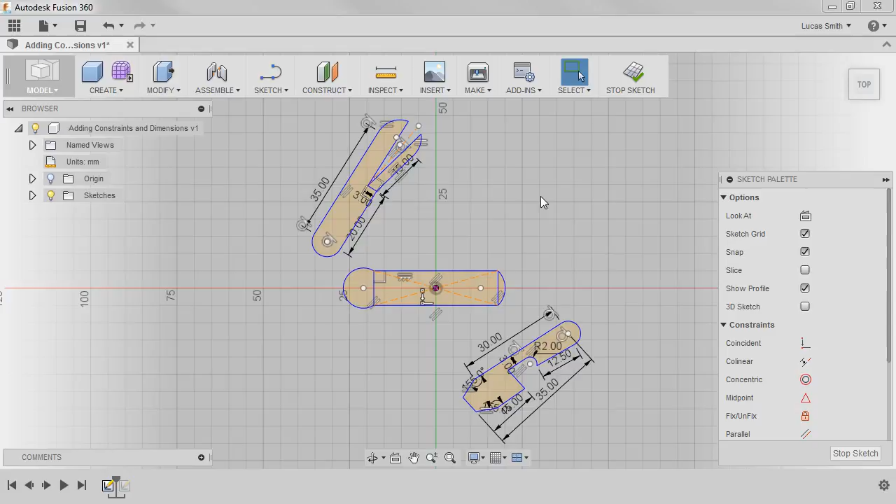To start, I'll constrain and dimension the center rectangle and the arcs in the center of the sketch. I'll zoom in and set the arc's tangent to the rectangle. I can do that easily by activating the tangent constraint, selecting the arc, and the top of the rectangle.

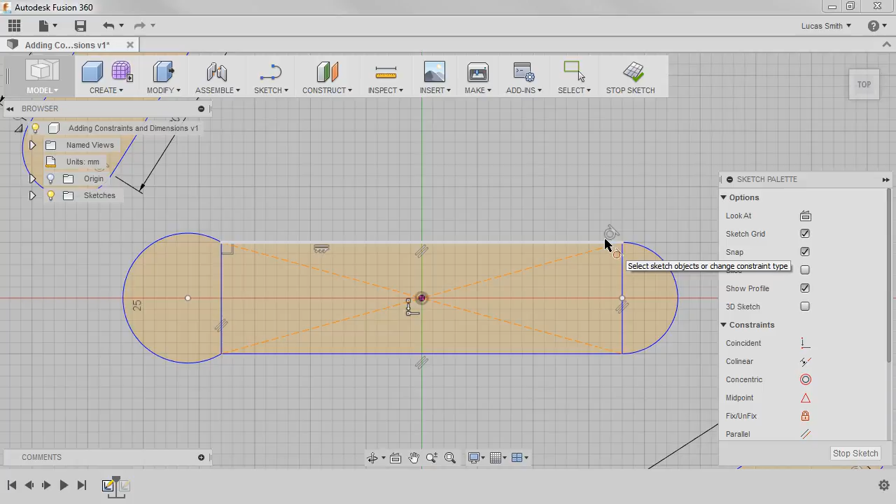For the other side, instead of using the tangent constraint, I can, in this case, obtain a mirrored result with the midpoint constraint. I'll activate the midpoint constraint, select the center point of the arc, and then the left line of the rectangle. Due to the geometry of the arc, this midpoint constraint will make the arc tangent to the rectangle.

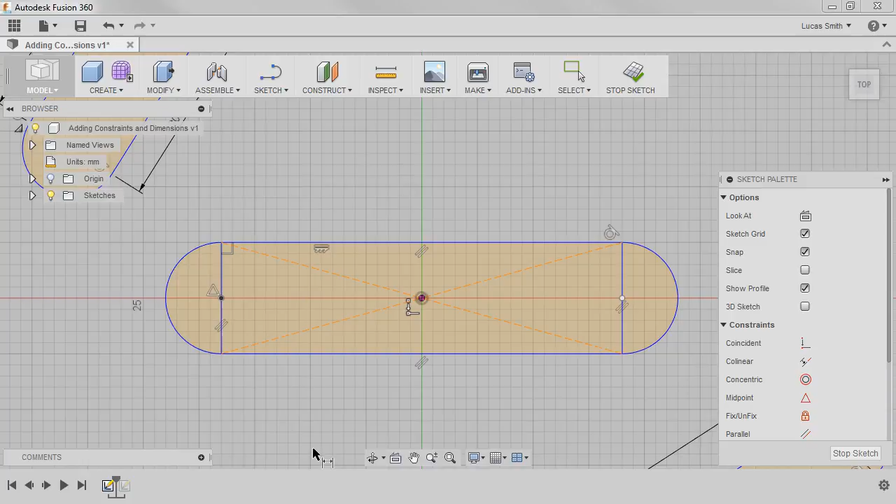To finish the handle, I'll activate the Sketch Dimension command. Set the radius of the right arc to 3 mm and the length of the rectangle to 60 mm.

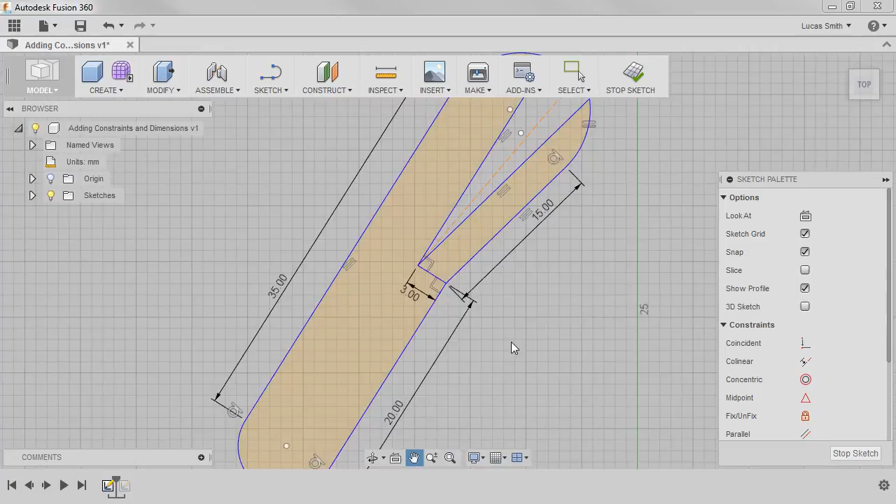Next, I'll constrain the scissors sketch and then connect them to the left side of the handle. I'll pan to better view the scissors. The first constraint I'll add is a symmetric constraint between the blades. I'll activate the symmetric constraint, select the flat line of the top blade, the flat line of the bottom blade, and finally, the construction line.

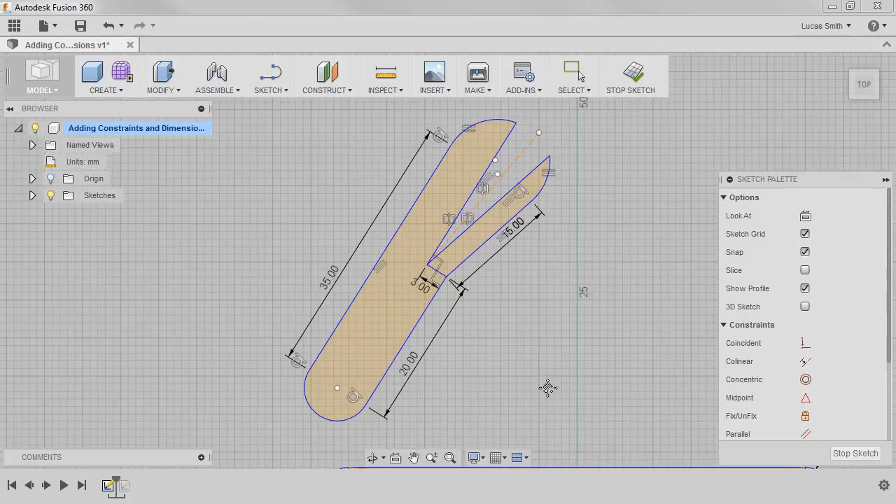Since I want the scissors to be the same size as the handle, I'll make the arcs at the ends equal. I'll activate the equal constraint. Select the arc at the base of the scissors, and then the left arc of the handle. Now I'll connect them by simply activating the coincident constraint and selecting the center point of both arcs.

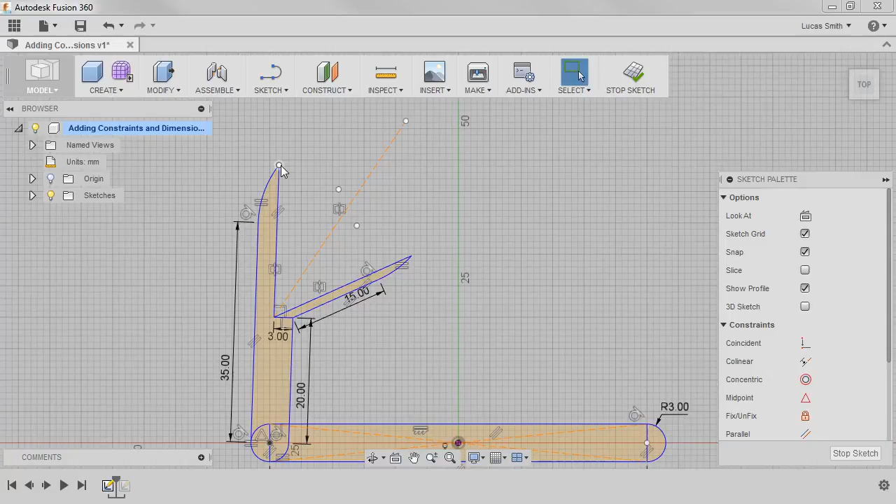I'll drag the top point of the left blade to bring the blade in, and finally, add a dimension to the blade arcs to finish the scissors. I'll activate the Sketch Dimension command and set the arc to 7 mm.

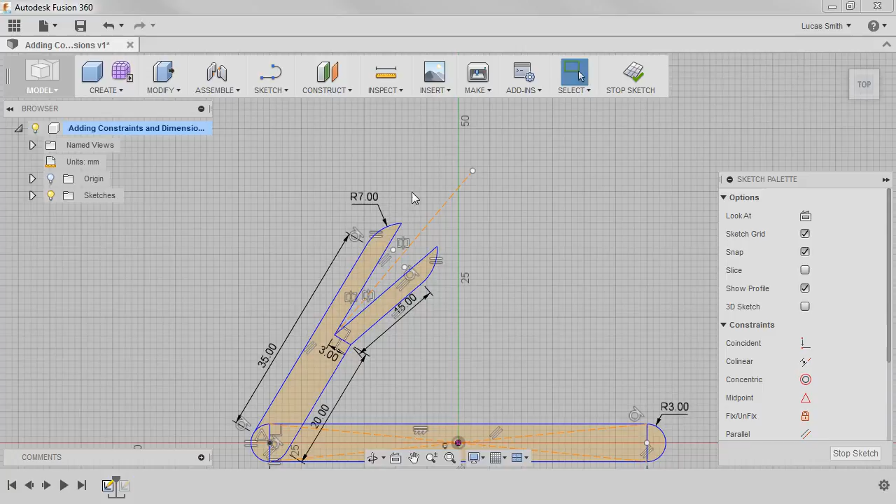Finally, I need to constrain the bottle opener and connect it to the handle. I'll pan over to it. And I'll first add a pair of perpendicular constraints to the cutout. I'll activate the perpendicular constraint, select the outer bottom line, and the connected cutout line.

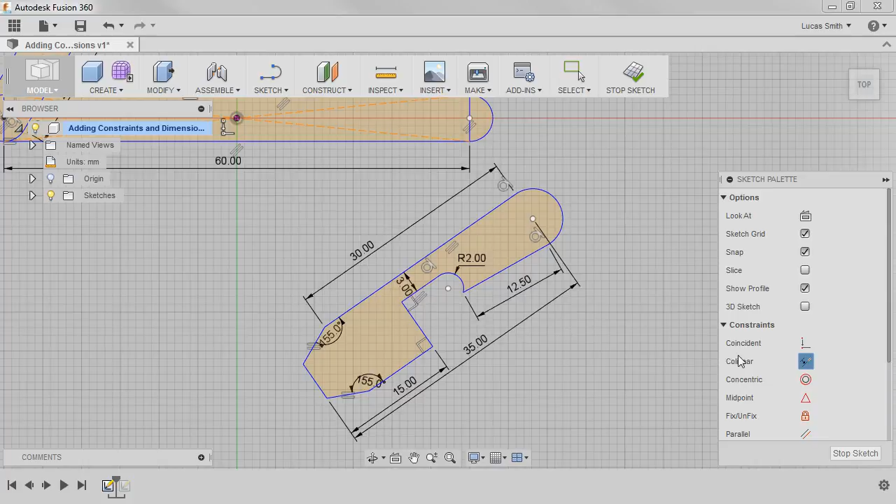Since the tool stays active, I can add the second constraint by reselecting the cutout line and the connected line leading to the arc. Next, I'll make the lines on either side of the cutout collinear. I'll activate the collinear constraint and select the two lines I wish to be collinear.

Now that all the constraints in the bottle opener are in place, I'll connect it to the base. I could make the center points of the arcs coincident like I did with the scissors, but this time I'll use the concentric constraint. I'll activate the concentric constraint, and instead of clicking the center points of the arcs, I'll select the arcs themselves.

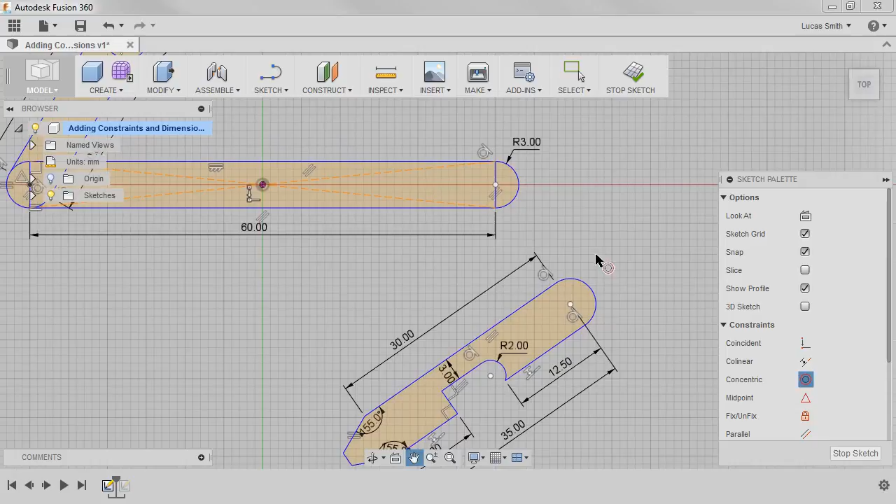To finish the sketch, I simply need to make the arcs equal. I'll activate the equal constraint and select both arcs. With that, the sketch is complete.